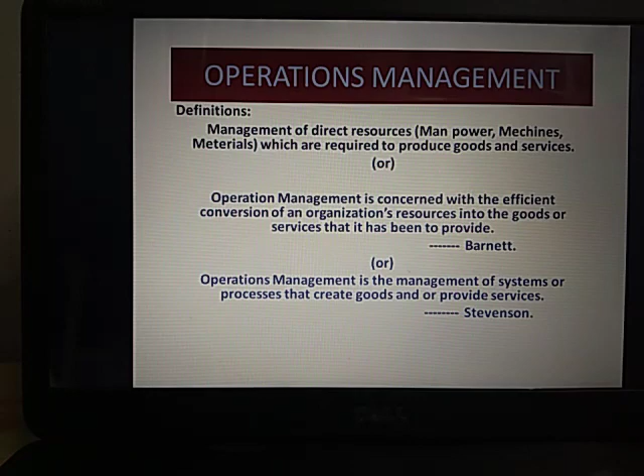So before going to understand operations management, we are understanding this by knowing the differences between products and services. Yesterday I clearly explained that earlier this management science used to be called production management. Because of advancements in the services sector, like the IT sector and hospitality industry, the production management transformed into operations management.

So when you talk about operations management, it involves production management as well as operations management - I mean the physical products and the service products. What are the best examples for physical products? Then what are the service products?

Now if you visit any five-star hotel, a warm welcome will be there - it's a kind of service for that they charge. Same way, when you go to any hospital, a doctor is going to advise you medicines based upon the problem - it's nothing but service. When you visit a saloon, based upon the customer demand, he or she is going to get a haircut. This also comes under what you call a service product.

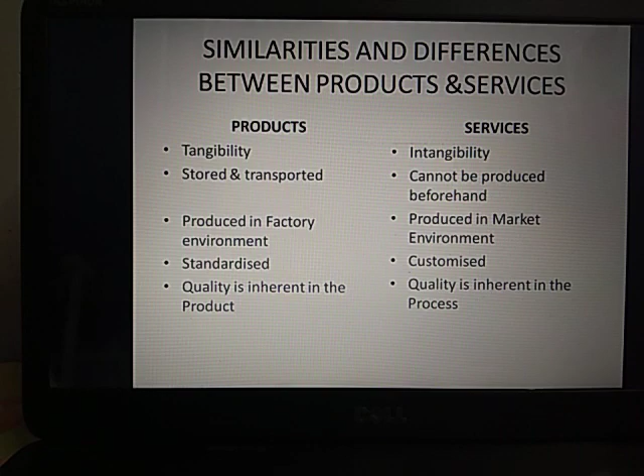Today we are going to discuss exclusively a few of the basic operations which will be performed while converting raw materials into a finished product. Be careful. What is that? A raw material into a finished product.

So let us suppose that I want a wooden chair. Okay, so wooden chair means what are the things required? You require wooden pieces. Before that, you will get that wood from the forest. Those wood pieces you are cutting into appropriate shapes, and all those pieces you are joining.

And after that, finally what you are going to have, you are going to give finishing. I mean to say, you are going to have the wonderful paint on that chair. Okay, so here we are exclusively understanding about the basic operations which are performed in the manufacturing of the physical product. Please keep in mind, physical product.

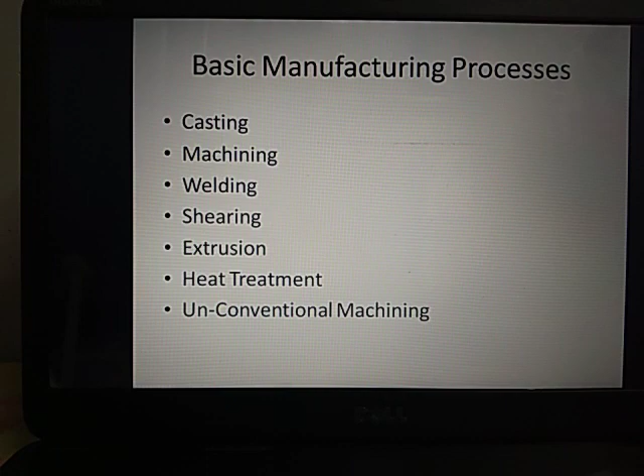Which are based upon wood. Okay, so like that if you think, so what do you get here? Casting process. A mold is created, means a particular shape, a cavity would be there. In that you are pouring all this molten material.

And you'll be waiting for some time. So based upon that, what will be there? You are going to have that product. You see here, all this molten metal is pouring into these molds made of sand, made of wood, isn't it? Permanent molds will be there, temporary molds will be there. So when you pour and wait for some time, that solidifies and takes that particular wanted shape.

But see that, can you imagine the temperature of this molten metal at high temperature? See the kind of clothes this guy wore, all protective clothes, because huge temperatures would be there. So this process, what you are calling the casting process, this is a very very basic operation as far as the manufacturing of physical products is concerned.

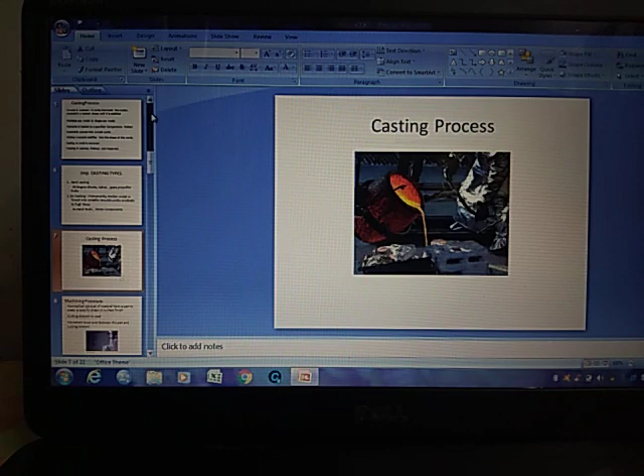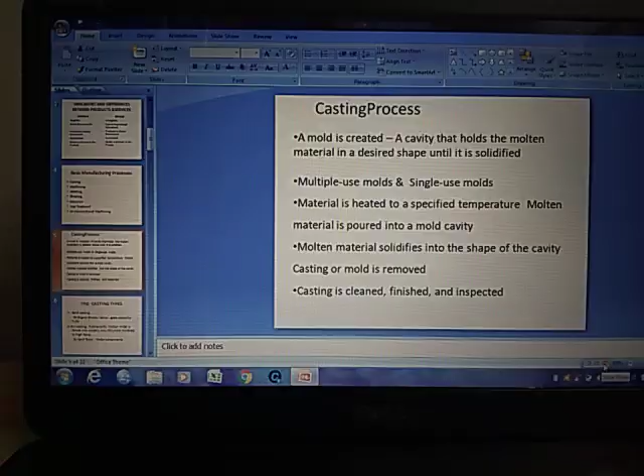So what is the casting process? A mold is created. What is a mold? A cavity that holds a molten metal in a desired shape until it is solidified. It becomes hardened.

What type of molds are there? The molds which can be used multiple times, or else for single use. Sometimes wooden molds will be there, and also sand molds will be manufactured.

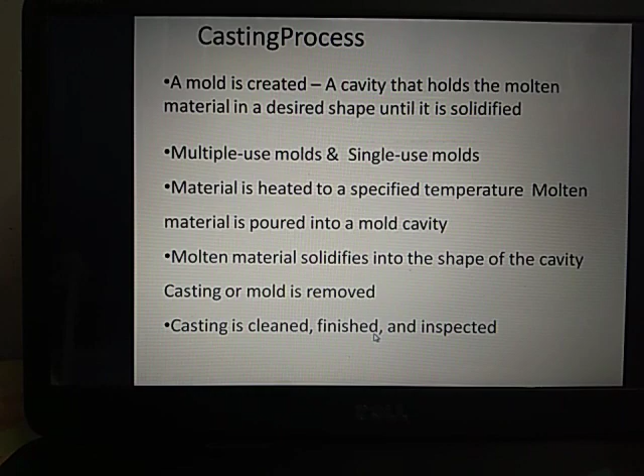So what are the various types? I told you, sand casting. Sand is very highly resistant to temperatures, but these are all temporary molds.

Through this you can manufacture engine blocks. If you take a two-wheeler or four-wheeler, engines will be there, so engine blocks will be manufactured by sand casting. Valves, gears, propeller hubs - these are all various kinds of parts of machinery.

The next one is another type, die casting. These are all permanent molds. Here, molten metal is forced into metallic molds under moderate to high pressure.

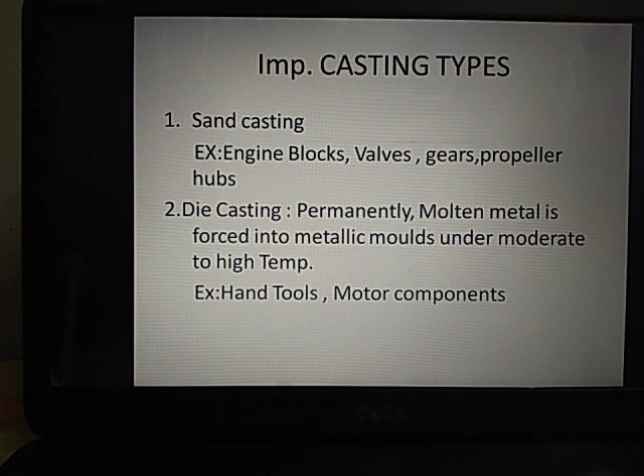With this, what can you manufacture? You can manufacture hand tools, motor components, etc. So what do you call this one as casting type? The first type of basic manufacturing operation.

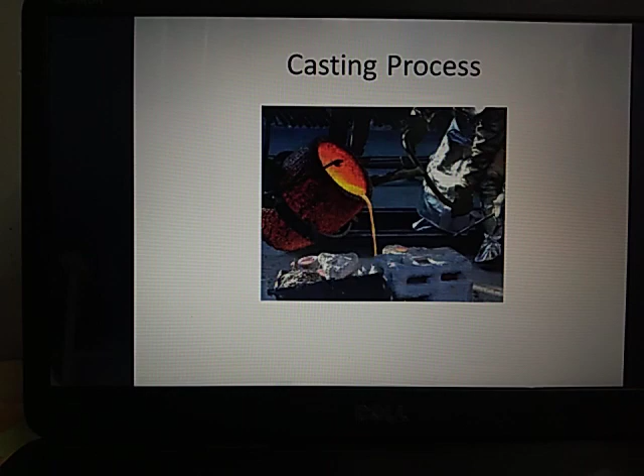After understanding the casting process, the next one is machining process. Machining process is nothing but simply removing extra material from any surface, that's all. So what is happening here? It is the controlled removal of material from a part to create a specific shape or surface.

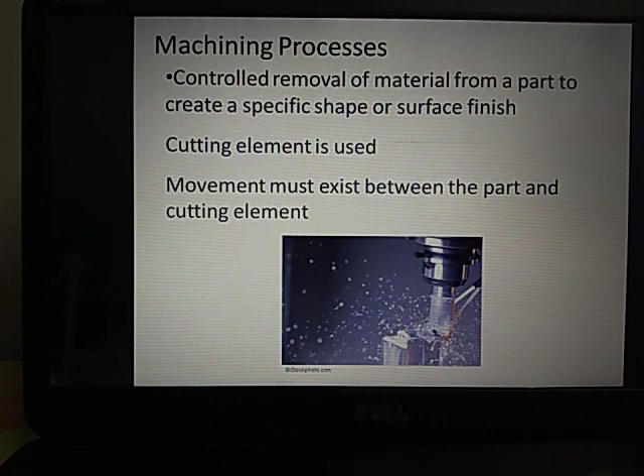As far as machining is concerned, various operations are there. What is that one? Turning process. So here, what is happening? The big machinery will turn the metals into these variety of shapes.

So at high speed, the metal rods are going to be rotating so that it pierces into the solidified metal, creating these kinds of items. So what do you call this one? Turning process - it is one of the machining processes.

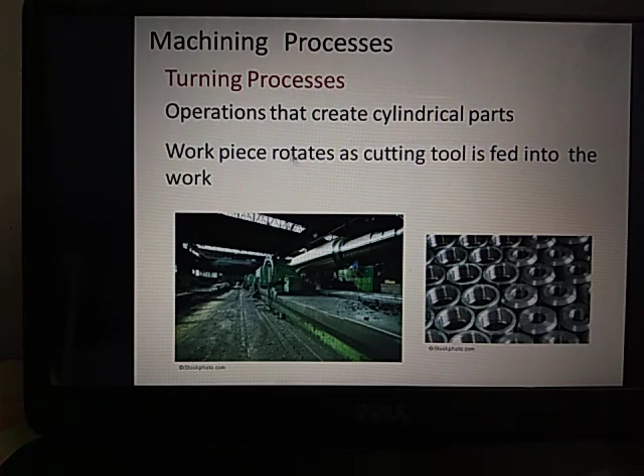What are the activities you perform under turning process, like straight, taper? See the terminology: contours, turning, facing, forming, necking, parting, boring, threading, and knurling. These are all peculiar terminology that explain the various operations when you go for performing machining operations.

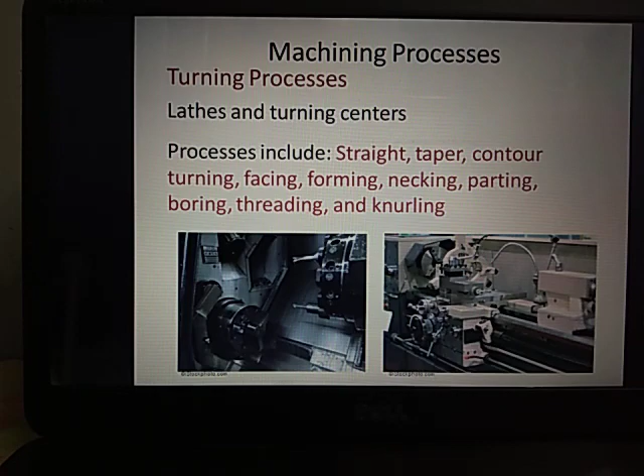The next one is milling process, which is also a kind of machining process only. Under milling, the operation will be on flat surfaces. So on flat surfaces, what will be there? Unwanted things will be removed.

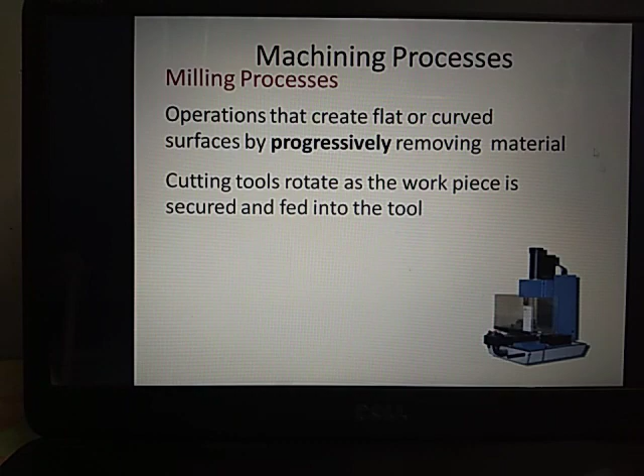You will be observing workers carving different designs on flat stones, isn't it? Same here also, on the flat surface metal sheets, milling operations will be taking place.

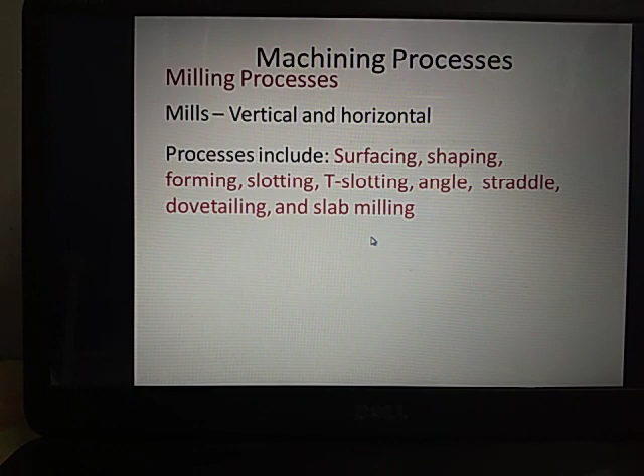So what are the things under milling operations you get? Surfacing, shaping, forming, slotting, T-slotting. These are all various procedures.

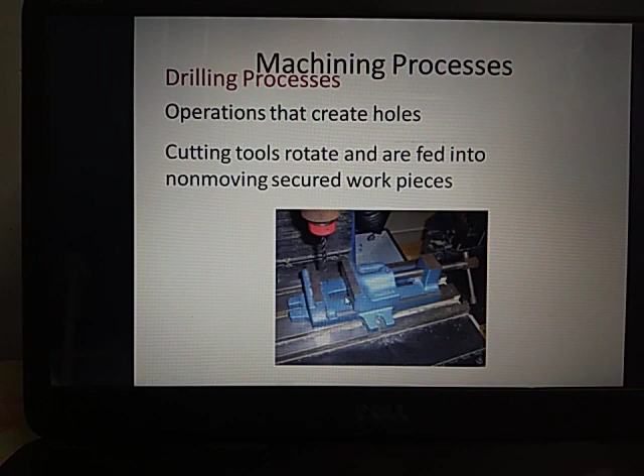See that nose of the drill, curly, it pierces into the wall. Same here, what is happening? It creates a hole into that wanted kind of metal. This is also a kind of machining process.

So what are the activities you perform? Drilling, counter drilling, step drilling, boring, counter boring, counter sinking, reaming, spot facing, and tapping.

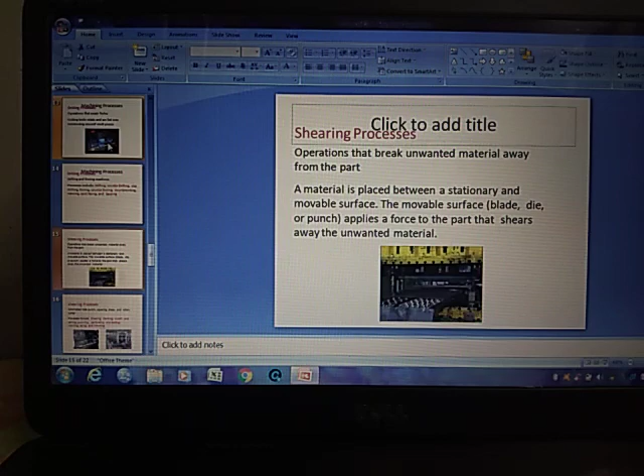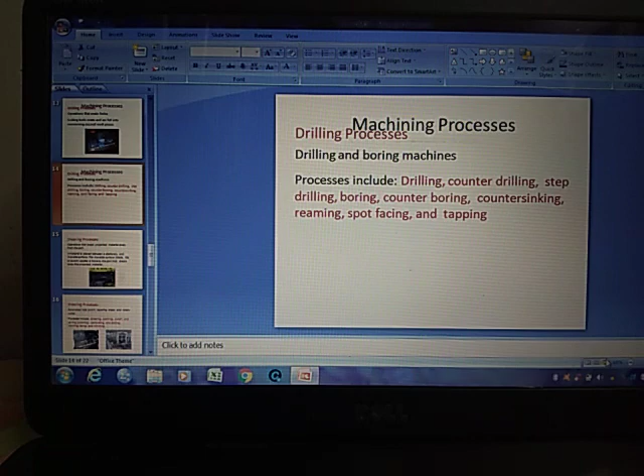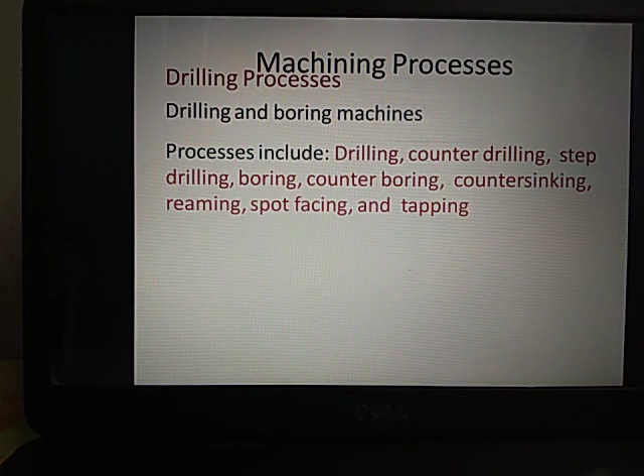So till now, what have we come to know? We came to know the basic differences between a physical product and a service product, and also various manufacturing operations. In that, we came to know two types of operations: one is casting, and one more is machining. So I stop here, and we'll continue in the next class.